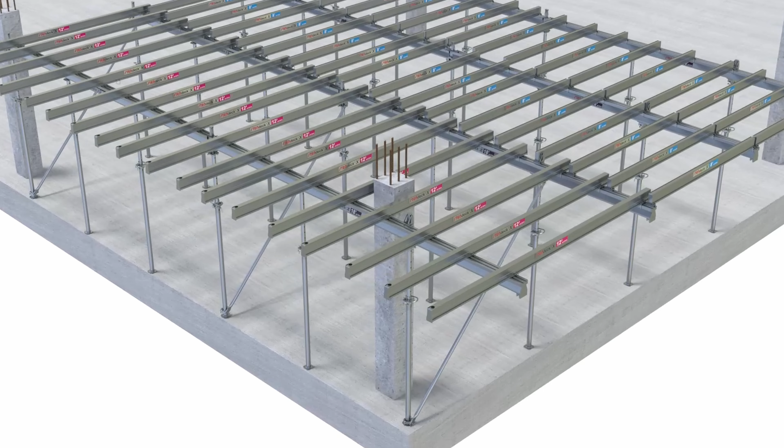STEN presents a very innovative system, different from anything known. The STENdeckX system consists of primary beams up to 18 feet that are assembled into drop heads. These heads incorporate an anti-overturning system that works automatically.

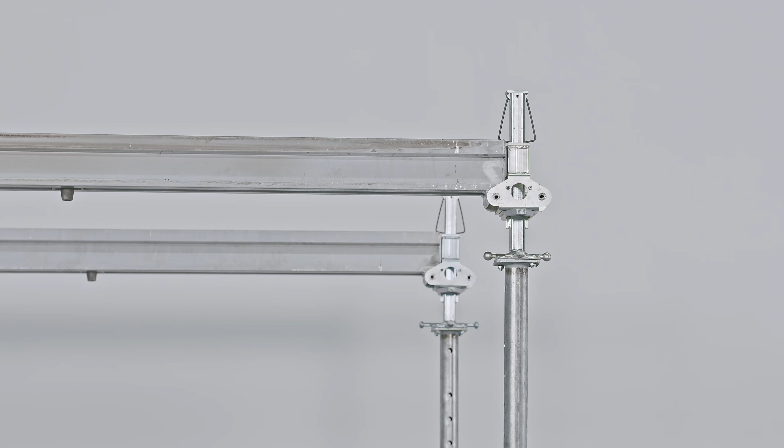The system also has secondary beams that are placed on top of the primary beams, fitted into the grooves that they have on their top side. These beams incorporate high-grade steel fasteners that move along them and allow them to be firmly attached to the primary beams when required. The lateral movement of the beams is limited by the drop heads themselves.

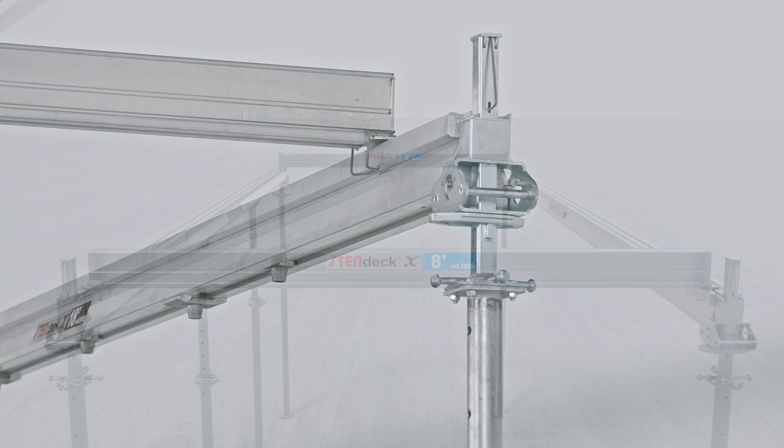The system also allows bays with a width less than the standard one. The elastic fasteners remain retracted in the parking position until required. Then they firmly attach both beams and prevent displacement or overturning.

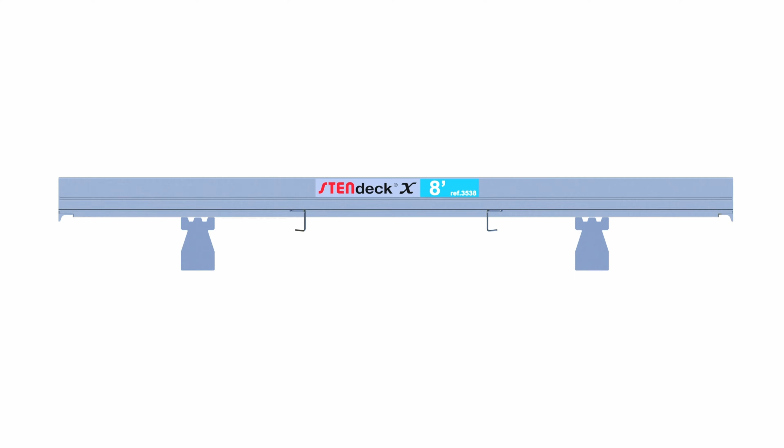Additionally, longer secondary beams can be used to easily build cantilevers up to 4 feet that are secured by the double high-grade steel fastener incorporated in the 10 and 12-foot secondary beams. These elements can support up to 5 times the working loads that occur on the cantilever.

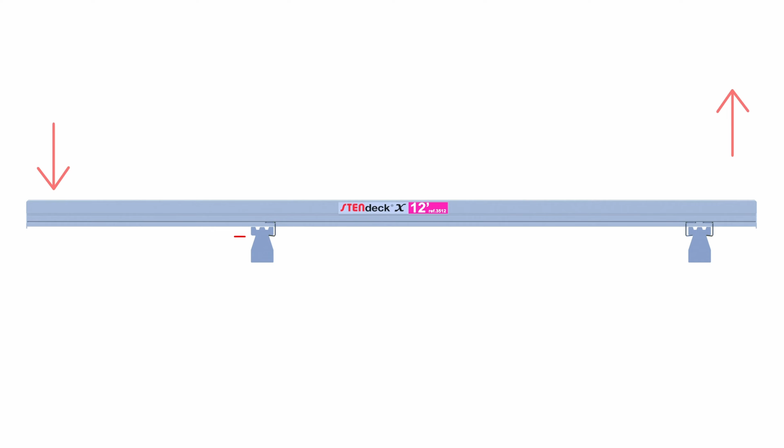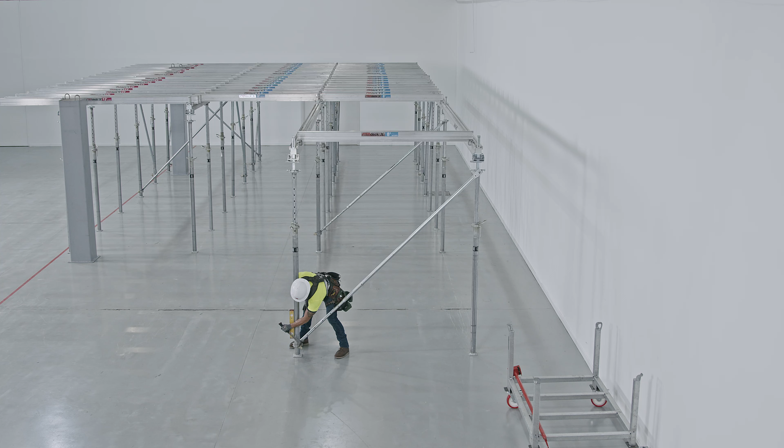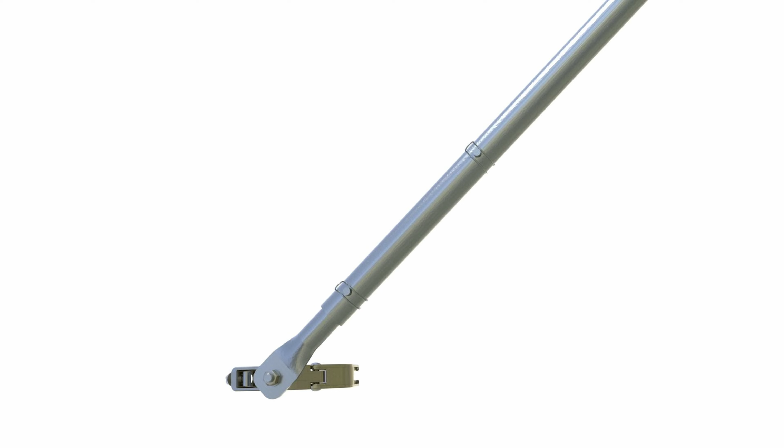The bracing pipes are set up from the ground thanks to the 4 anchoring points incorporated in all the drop heads. This reduces to a minimum the number of diagonals needed to fully stabilize the system. The telescopic bracing pipes allow their length to be adjusted to adapt it to different bay heights and widths. This way, the bottom end can always be set close to the base of the post.

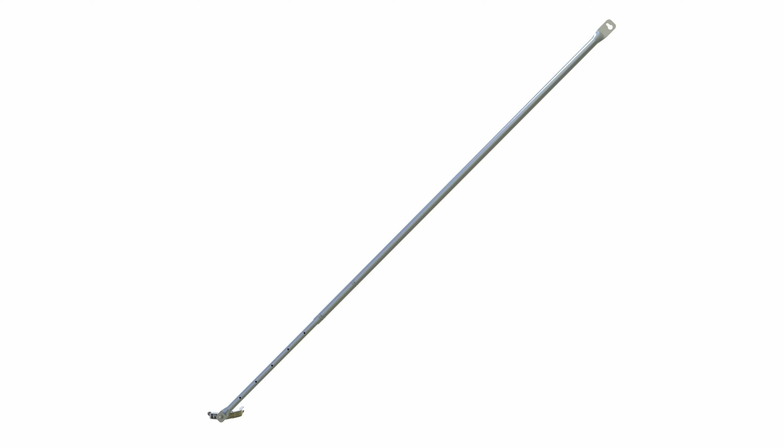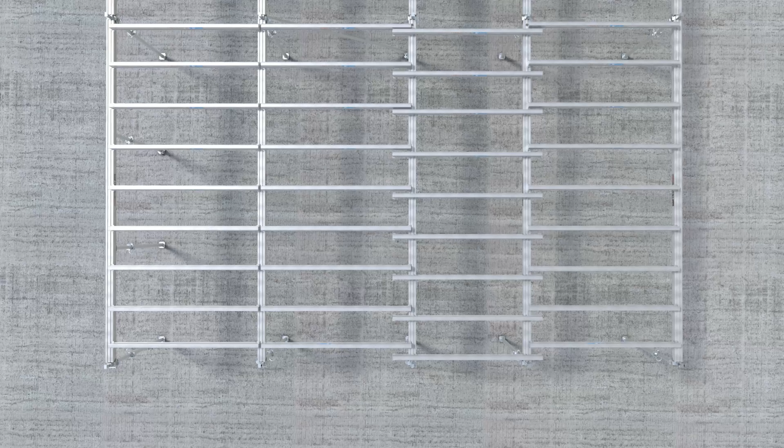By being able to set up the secondary beams out of the grooves of the primary beams, it is possible to continuously adjust the dimensions of the formwork in the direction of the secondary beams. The system allows the primary beams to be overlapped so that the length can also be adjusted in the other direction of the formwork.

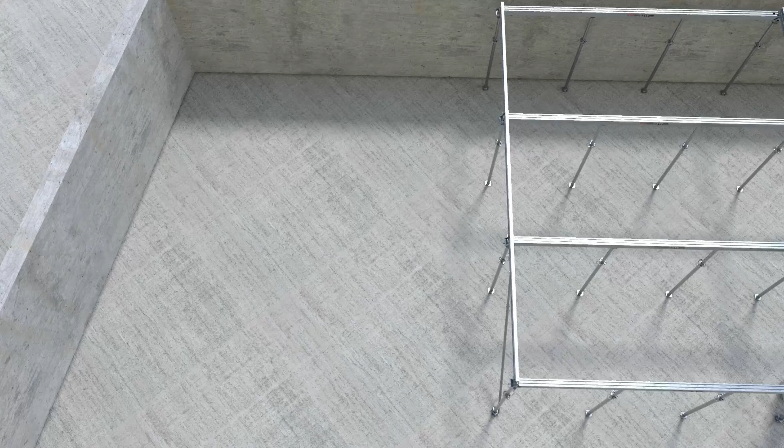To proceed with the assembly of the overlapping beams, the overlapping distance must first be adjusted. To do this, the last 2 beams of each alignment are distributed on the ground, one at the base of the system and the other at the desired distance from the end of the element to be formed.

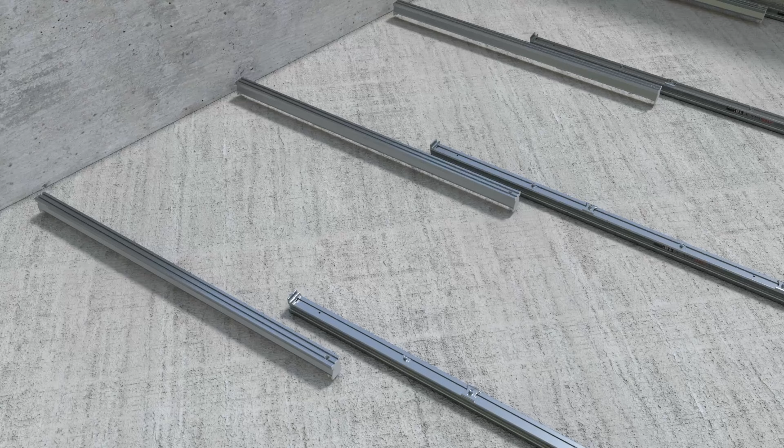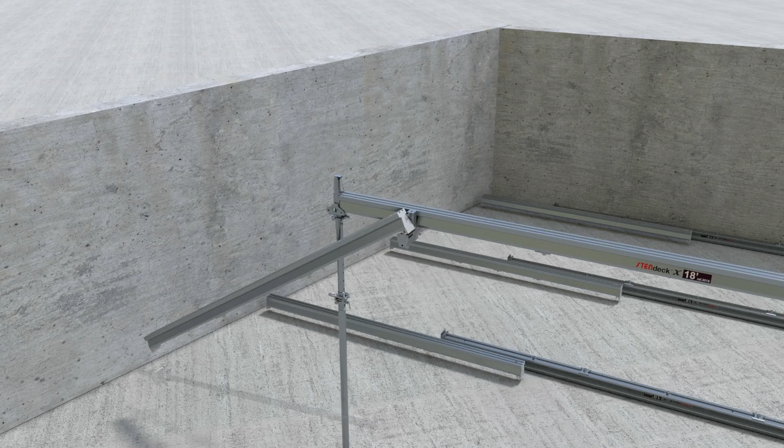Once the overlap is adjusted, the 2 beams are connected using the overlap head, which is installed in the position indicated by the end of the adjustment beam, and it is firmly connected to the preceding beam. The beam is lifted with the head already installed, and the adjustment beam is placed in the ladder. Both beams are firmly joined. Thus, the necessary length is achieved in each alignment of primaries, and the easy solution of irregular perimeters is ensured.

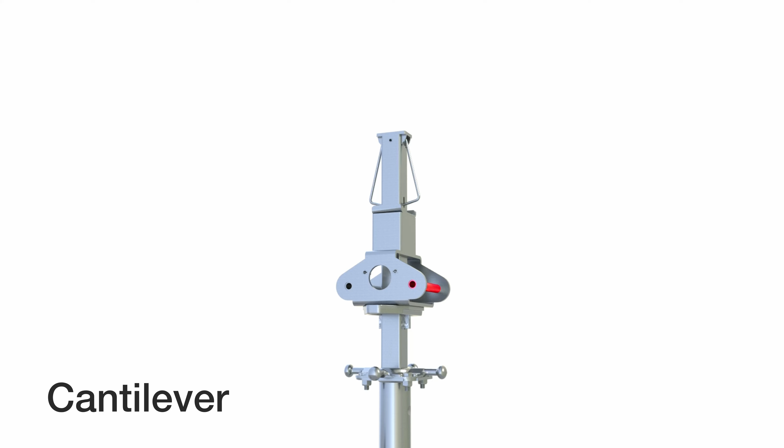The continuous adjustment in the direction of the secondary beams allows the creation of bays with the desired width, even if it consists of non-parallel main beams. The elastic fastener provides secure connections of non-perpendicular beams. The drop head has pivoting supports to facilitate the insertion of the primary beams. It also incorporates a fast recovery system using a cross wedge and has anchors for bracing on all sides.

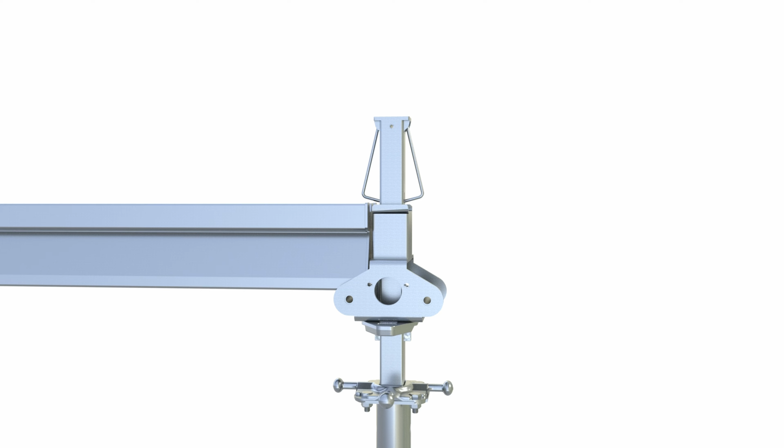At the top, it has retractable springs that allow the primary beams to be installed by tilting from the ground or vertically when they are set from a high platform, like a scissor lift. Thanks to these springs, the beam is secured against loads on the cantilever. The cantilever loads in both directions are automatically stabilized, thanks to the set of connecting elements of the system.

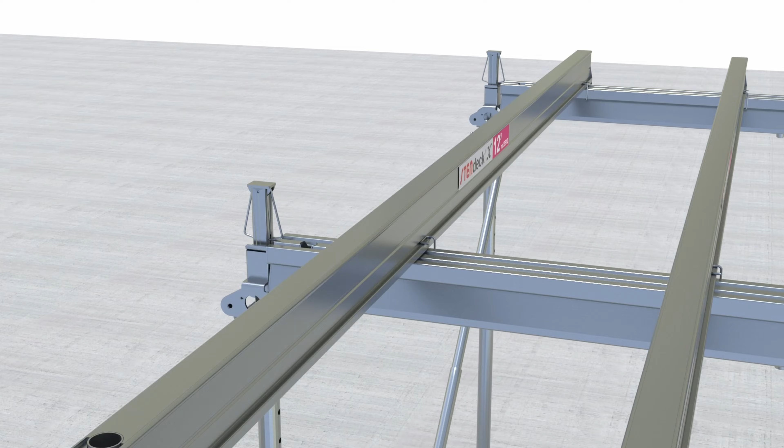In the case of loads on the ends of the main beams, the anti-overturning device, incorporated in all standard drop heads, ensures the stability of the system. The cantilever loads on the secondary beams are transmitted to the primary beams by using a double elastic fastener incorporated in all the 10 and 12-foot beams.

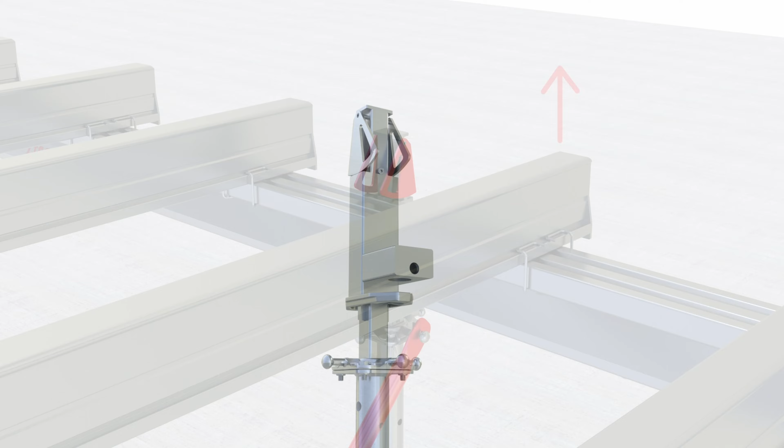At the corners, the cantilever head prevents the loads on the secondary beams from causing an unwanted movement of the primary beam. This head connects the beam to the post, and the diagonal stabilizes the whole set. This head maintains the same wedge recovery system and the anchors for bracing.

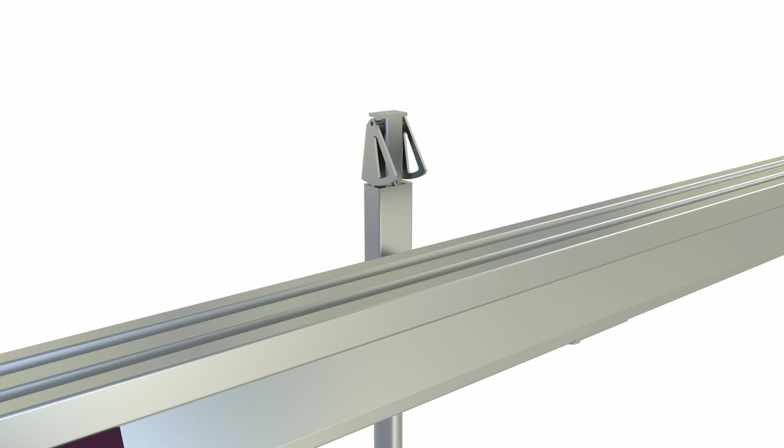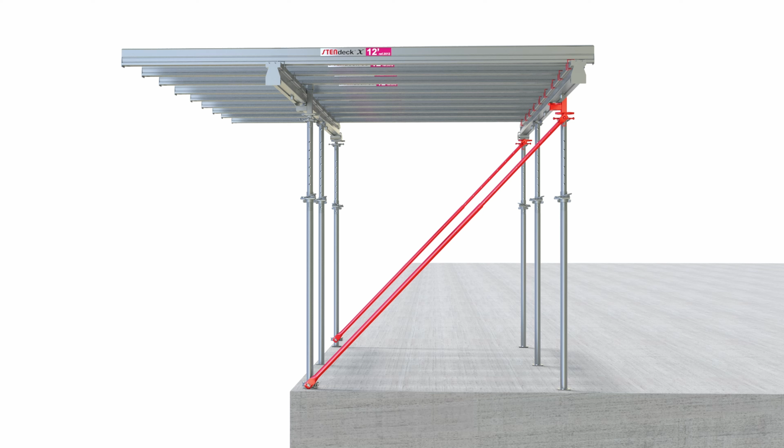It comes at the top with a tilting part that allows the beams to be installed easily and secures them against vertical loads that can occur in areas close to corners. The combined work of elastic clips, drop heads, and bracing ensures the stability of the system in all situations.

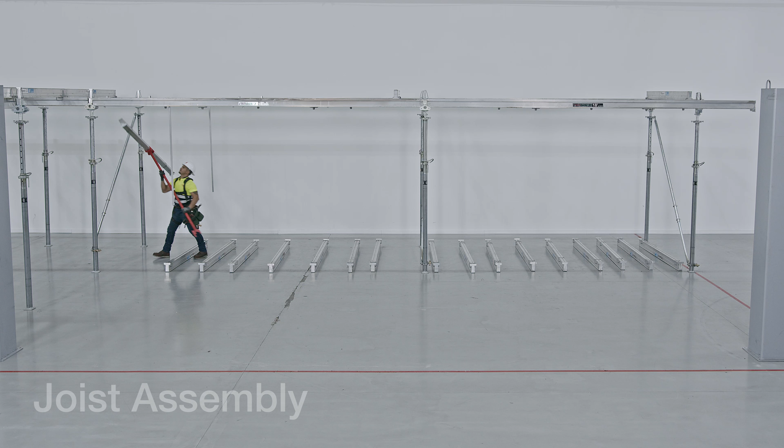The design and reduced weight of the secondary beams allow a single person to assemble them quickly and safely from the ground. The use of the portable gauge allows them to be placed in their final position with precision and speed. The 8-foot gauge is easily moved as the assembly progresses.

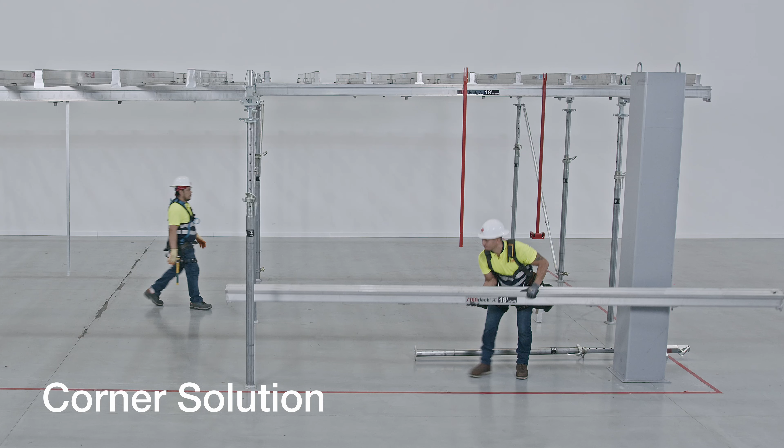The secondary beams placed on the cantilever are lifted from the inside of the slab perimeter and slid into their final position with maximum safety. Thanks to this combination of cantilever solutions, it is not necessary to change the direction of the main beams.

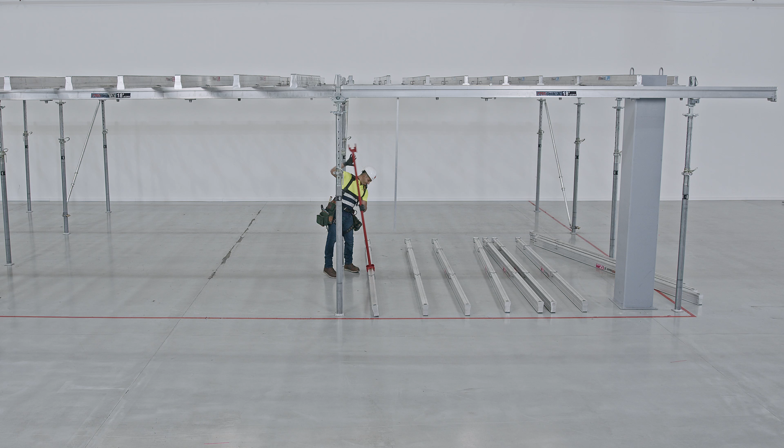Even 12-foot beams can be assembled from the ground and with the worker within the perimeter of the slab. With this assembly method, corners are resolved easily and safely. All that remains is to lock the fasteners of all the cantilever beams to secure the corner.

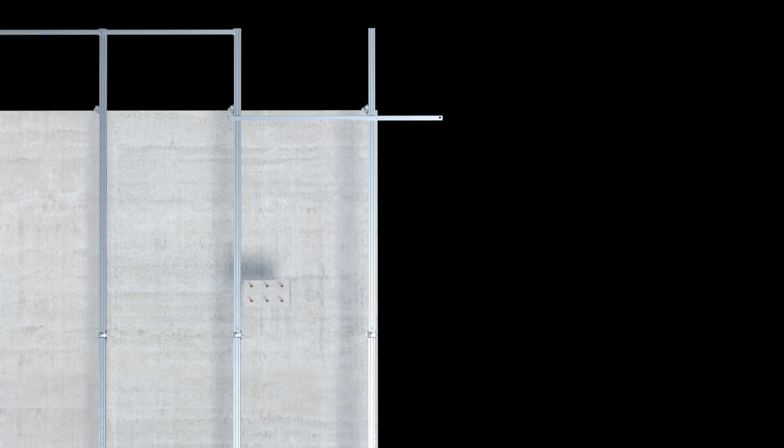The cantilever head ensures the stability of the primary beams in the cantilevers, which, combined with the 12-foot secondary beams, allow the corners to be solved in a simple, fast, and safe way. By being able to overlap the main beams, the cantilever can be adjusted continuously and independently in each alignment. In addition, secondary beams can be installed at a wide range of angles.

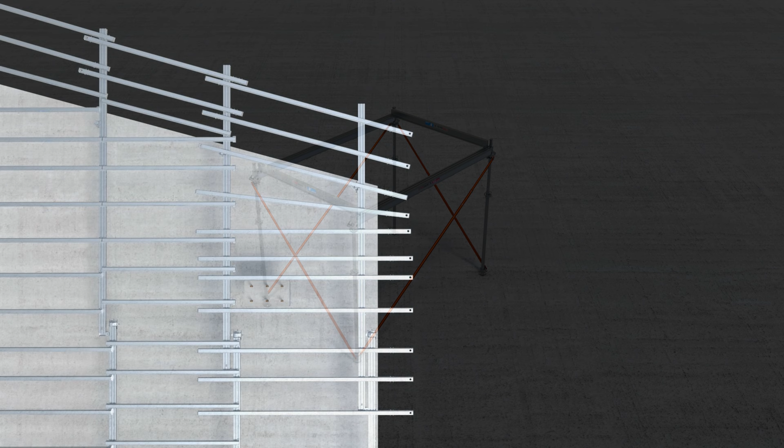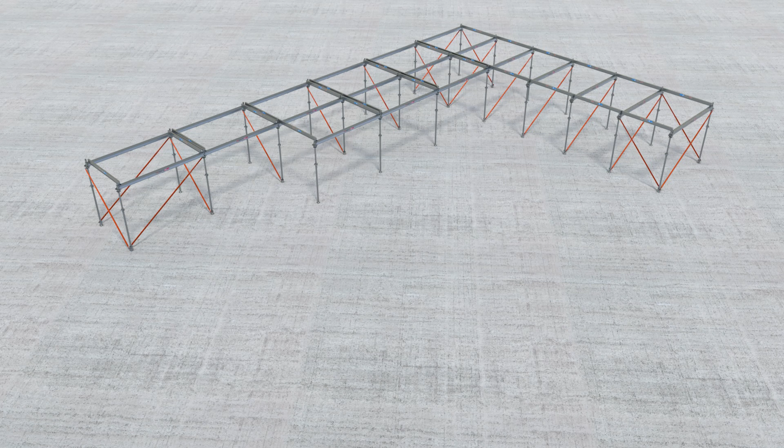Once the elastic fasteners are locked, the position and stability of the secondary beams are ensured. Thanks to the use of metal diagonals, the number of bracings is extremely reduced. Once the first bays of each alignment have been braced, the assembly progresses quickly without requiring any type of bracing, since the effect of the diagonal extends through the system itself. It is enough to brace one diagonal every 5 bays, resulting in an impact that can drop to 1 bracing per 200 square feet.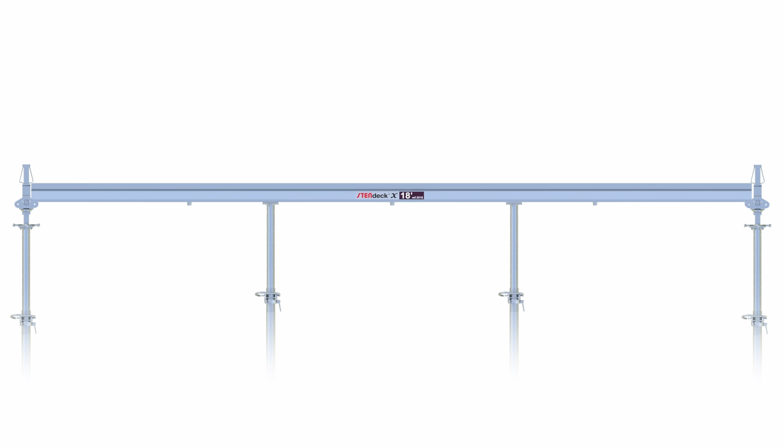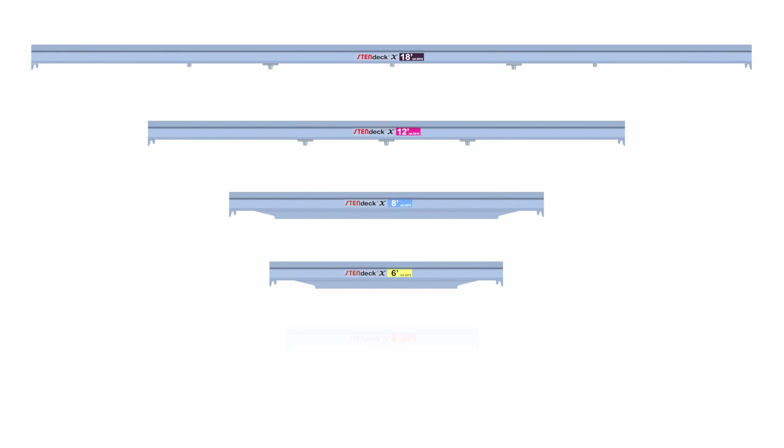The range of main beams is made up of 18-foot beams, which require 2 intermediate post shores in a standard configuration, and the 12-foot beams, which only need 1 intermediate post. The 8, 6, 5, and 4-foot beams are supported at their ends.

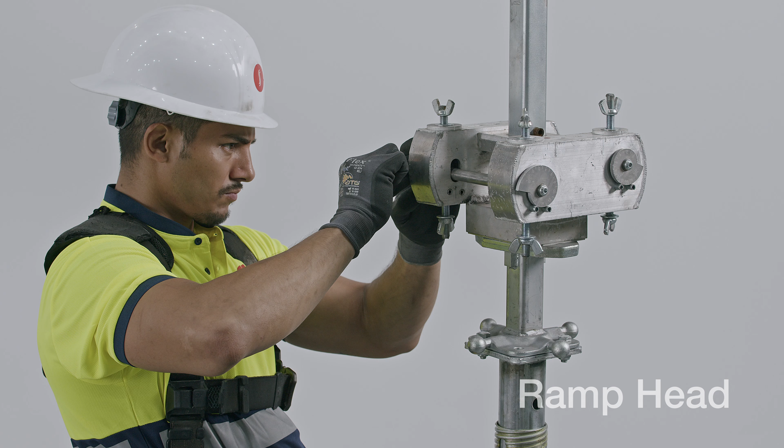For the construction of sloped slabs up to 20%, the system has a ramp head that adjusts the relative height between primary beams. It has aluminum and stainless steel elements to achieve a contained weight and great durability. Its design allows the post and drop head to remain completely vertical.

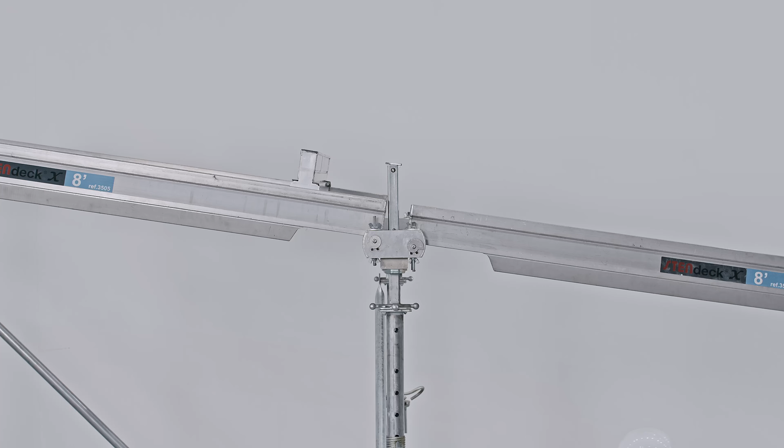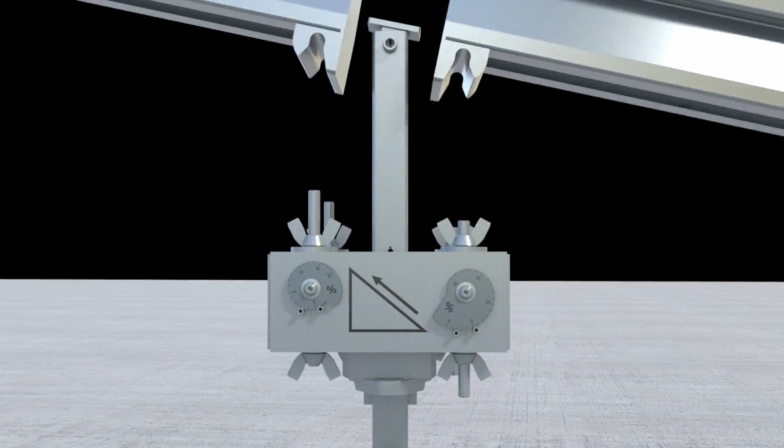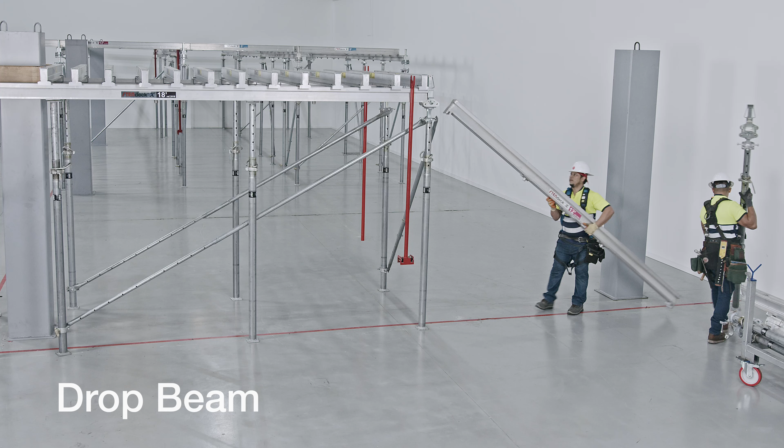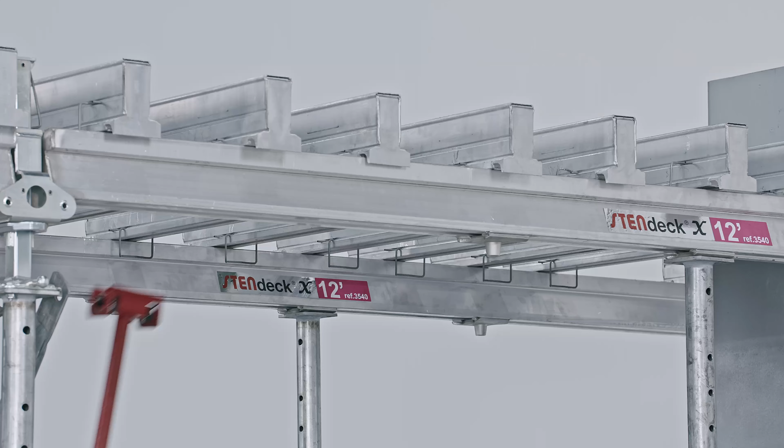The ramp head incorporates graduated shifts where the slope percentage of the slab to be built is directly adjusted. Thanks to this, the beams are perfectly aligned. The system allows the use of the same elements used in the flat slabs to safely and efficiently resolve the formwork of the bottom of the drop beams. It is only necessary to secure all the secondary beams with the elastic clip to achieve maximum stability.

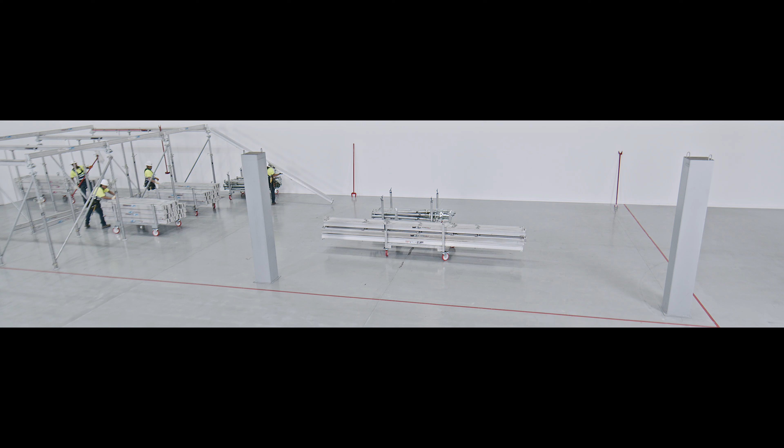The system offers a very high assembly speed on flat slabs, thanks to primary beam lengths up to 18 feet.

One carpenter assembles the basic skeleton, made up of the primary beams and the posts that support them at their ends, the secondary beams closing the grids and the bracing. Three carpenters follow him, installing the rest of the secondary beams.